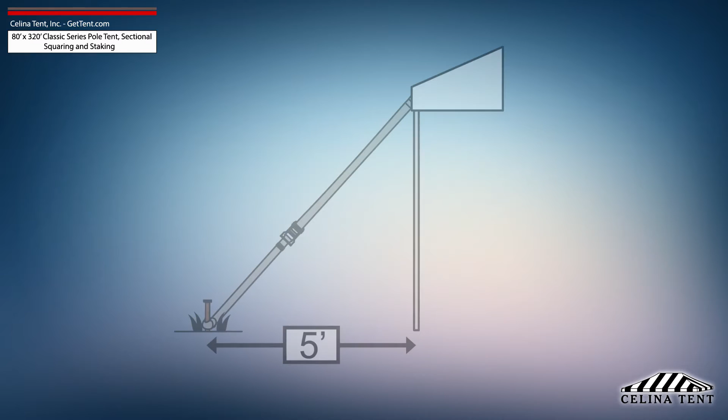This video covers squaring and 5-foot staking applicable to a sectional 80-foot by 320-foot Classic Series pole tent from Celina Tent. 5-foot staking is standard for tents with an eave height of 7 or 8 feet and would need to be adjusted for eave heights other than this standard.

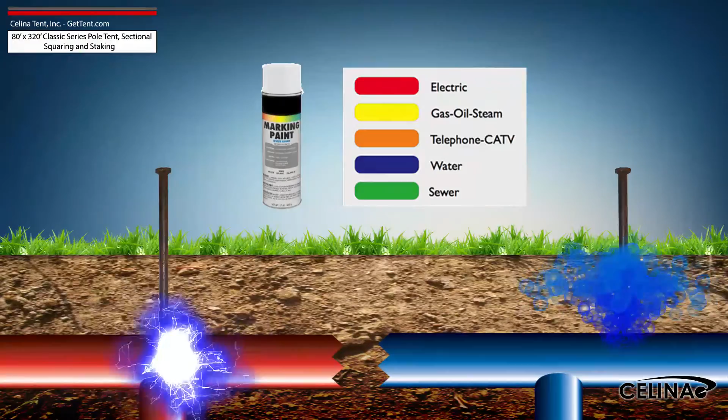Tent squaring allows the installer to accurately place all tent hardware and install tent stakes prior to beginning setup, and helps them avoid any marked underground utilities. Utilities must be marked by your state's local utility services prior to any tent installation.

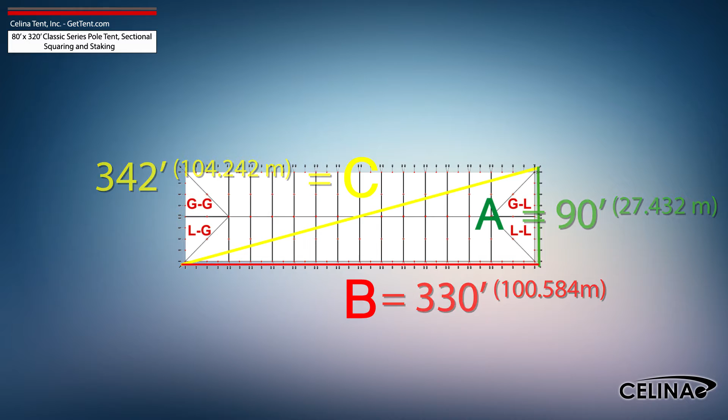Using the Pythagorean theorem and adjusting out for 5-foot staking, the entire tent footprint will be 90 foot by 330 foot, with a 342-foot diagonal length. Celina recommends that an 80-foot by 320-foot Classic Series pole tent receives a minimum of 290 stakes.

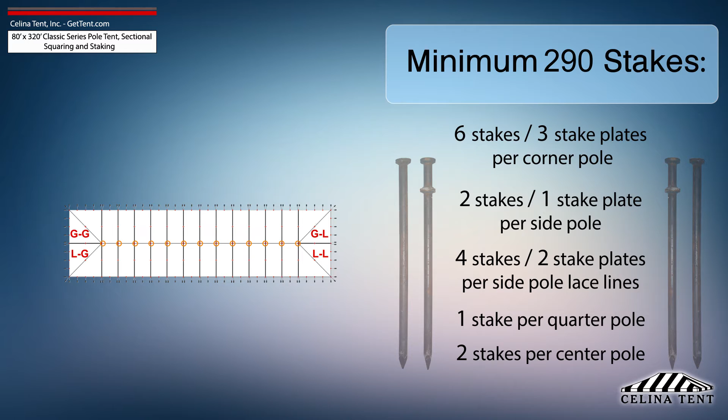6 stakes and 3 stake plates for each corner pole, 2 stakes and 1 stake plate for each side pole, 4 stakes and 2 stake plates for each side pole at lace line locations, 1 stake for each quarter pole, and 2 stakes for each center pole. This amount of stakes provides the minimum amount of security for a pole tent of this size. Additional staking is required for any site that doesn't meet optimal soil conditions.

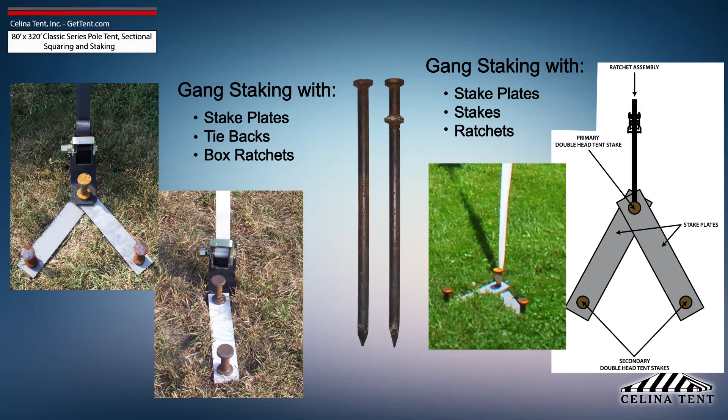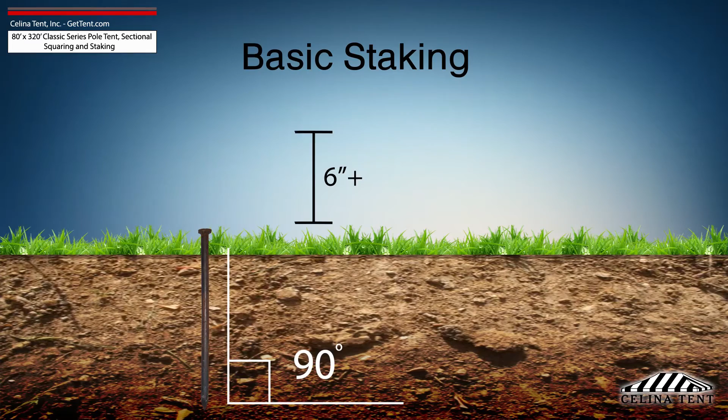Tent staking is the most important safety procedure during tent installation. Tent stakes should be driven vertically so that the stake is as close to the ground as possible with space to tie on a strap. Any length of stake protruding from the ground that is more than 6 inches will have detrimental effects on the holding power of the stake. Attach the ratchet strap or rope as close to the ground as possible to reduce strain on the stake.

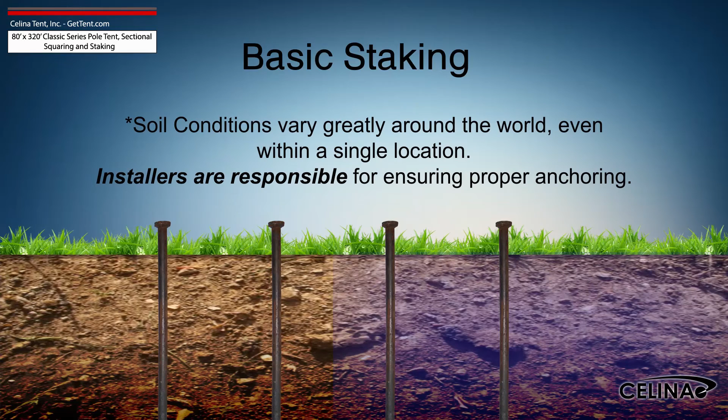It is the installer's duty to inspect the soil conditions and possible weather effects for the duration of the tent installation. For water-saturated or loose soil, more tent stakes are required to achieve adequate anchoring. Staking may be increased using dual stakes and a staking plate, or gang staking utilizing 2 staking plates and 3 stakes.